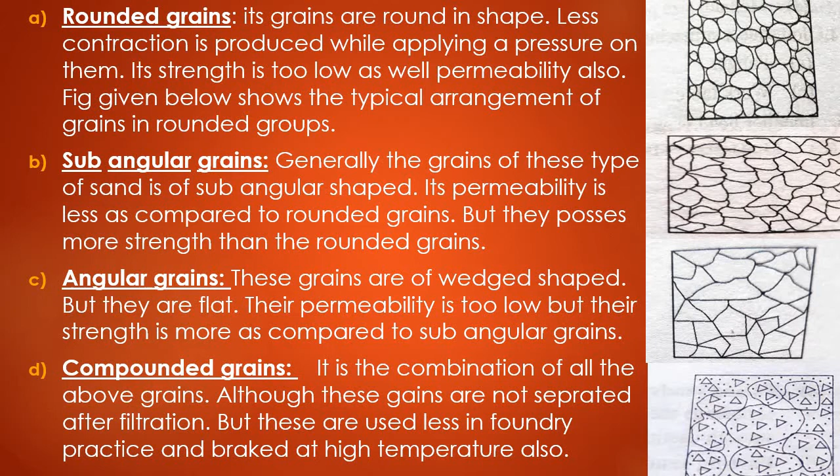Compound grains: it is the combination of all the above grains. Although these grains are not separated after filtration, these are used less in foundry practice and crack at high temperature also. Clay.

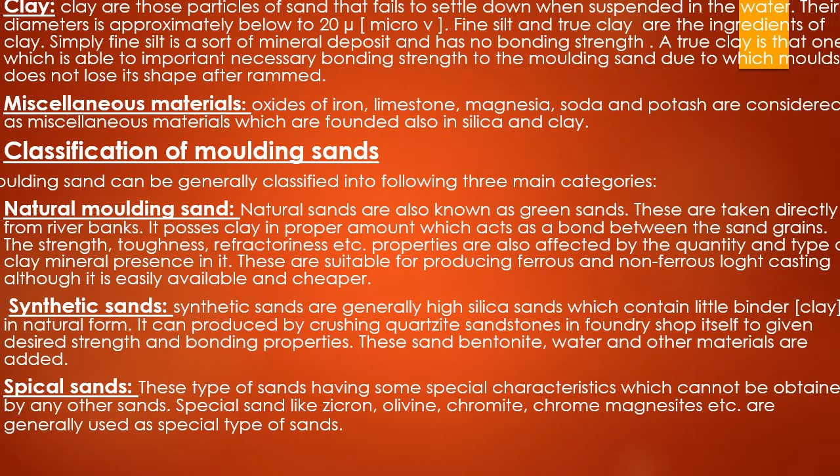Special sands: these types of sands have some special characteristics which cannot be obtained by any other sands. Special sands like zircon, olivine, chromite, magnesite, etc. are generally used as special types of sands. Types of molding sands.

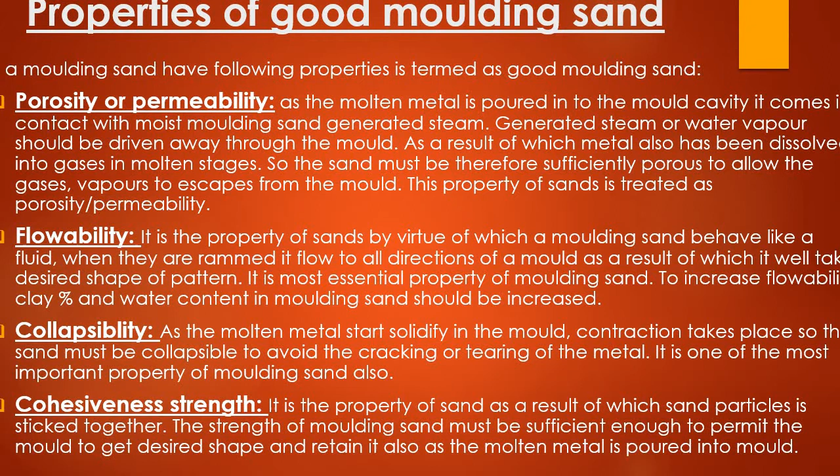Also, cohesive strength. It is the property of sand as a result of which sand particles stick together. The strength of molding sand must be sufficient enough to permit the mold to get the desired shape and retain it also as the molten metal is poured into the mold.

Adhesiveness. Adhesiveness is that property of sands due to which they are capable of adhering to the surface of other materials. Refractoriness. Refractoriness is that property of sands by virtue of which it can withstand the very high temperature of the molten metal without fusing.

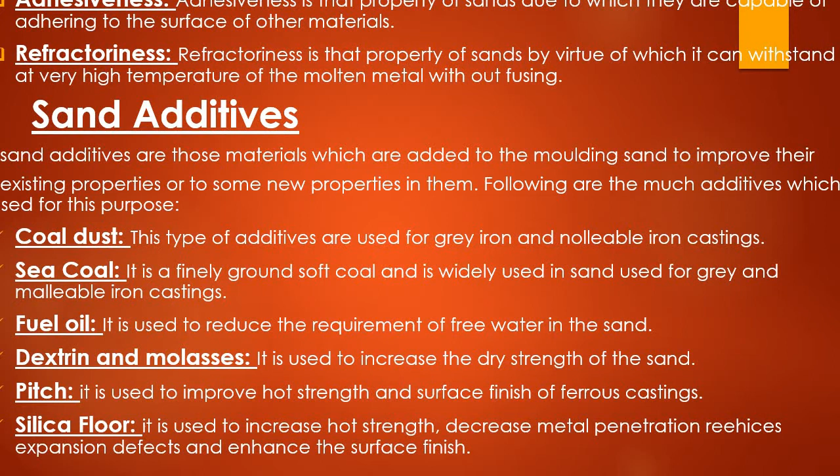Pitch. It is used to improve hot strength and surface finish of ferrous castings. Silica flour. It is used to increase hot strength, decrease metal penetration, resist expansion defects, and enhance the surface finish.

Wood flour. It increases the mold wall movement, resists the expansion defects, increases collapsibility, improves surface finish and thermal stability of the mold. Cereal or corn flour. It increases the mold wall movement by being volatilized by heat, reduces expansion defects, improves strength, toughness and collapsibility of the sand, but it reduces permeability and flowability of sands.

Preparation. Sand preparation is completed in the following three main steps. Mixing sand. Generally, few materials have all the qualities that should be possessed in molding sands, so it becomes essential to mix a particular sand with another one. For this purpose, sand is mixed with clay; lime, magnesia, potash, sawdust, coal dust, etc. are added in the sand in small quantities, due to which the sand becomes capable of withstanding high temperature, but there is no bonding strength in them. Clay plays an important role to bond the molding sand.

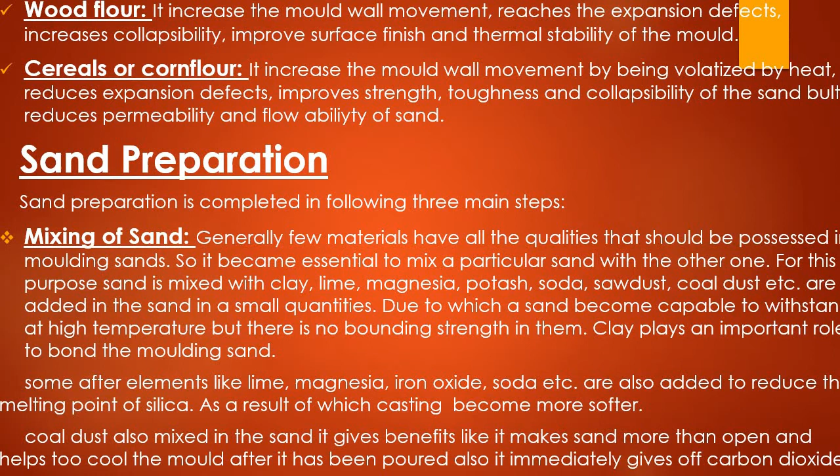Sand tempering. Before starting to make a mold, sand must be tempered. Sand tempering is known as the process in which sufficient moisture content is added to the molding sand. Sand conditioning. It is the most important step in the sand preparation process. In this process, new and used sand must be conditioned well before start using.